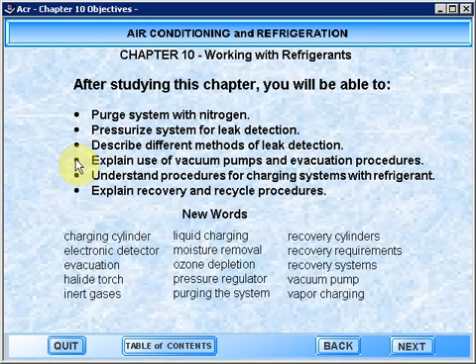After studying this chapter, you will be able to purge a system with nitrogen, pressurize a system for leak detection, describe different methods of leak detection, explain the use of vacuum pumps and evacuation procedures, understand procedures for charging systems with refrigerant, and explain the recovery and recycle procedures.

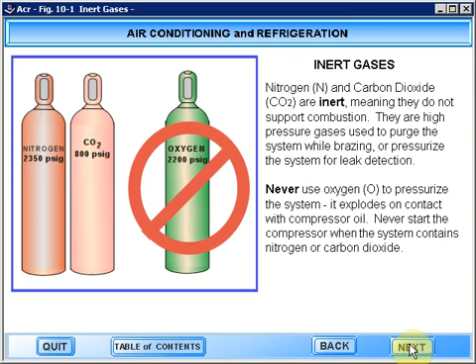Nitrogen and carbon dioxide are inert, meaning they do not support combustion. They are high-pressure gases used to purge the system while brazing or pressurize the system for leak detection. Never use oxygen to pressurize the system; it explodes on contact with compressor oil. Never start the compressor when the system contains nitrogen or carbon dioxide.

A special pressure regulator is used when working with high-pressure nitrogen or carbon dioxide gases. Flow pressure should not exceed 300 pounds gauge. Clockwise movement of the flow adjustment increases flow pressure, and counterclockwise decreases flow pressure.

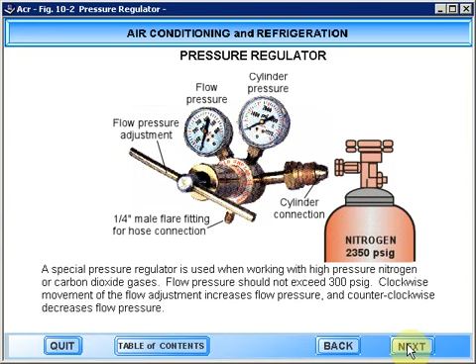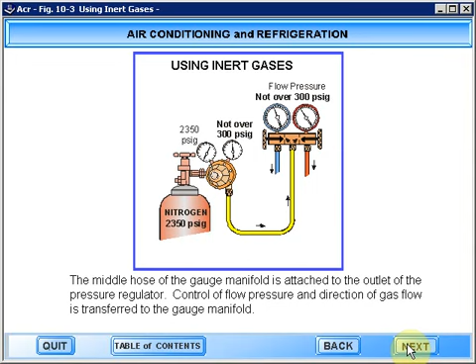The middle hose of the gauge manifold is attached to the outlet of the pressure regulator. Control of flow pressure and direction of gas flow is transferred to the gauge manifold.

Purging the system with nitrogen while brazing keeps the system clean and reduces the time required for evacuation. A continuous flow of nitrogen at 2 to 3 pounds pushes atmospheric air and moisture out of the system to prevent internal oxidation. The nitrogen is vented to the atmosphere to prevent pressure buildup.

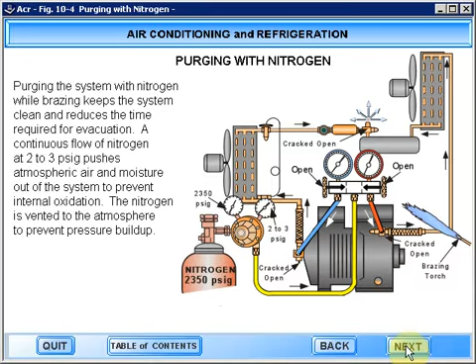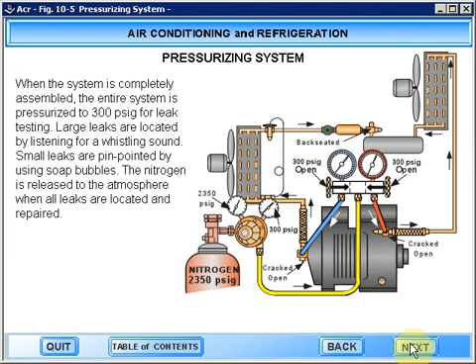When the system is completely assembled, the entire system is pressurized to 300 pounds for leak testing. Large leaks are located by listening for a whistling sound. Small leaks are pinpointed by using soap bubbles. The nitrogen is released to the atmosphere when all leaks are located and repaired.

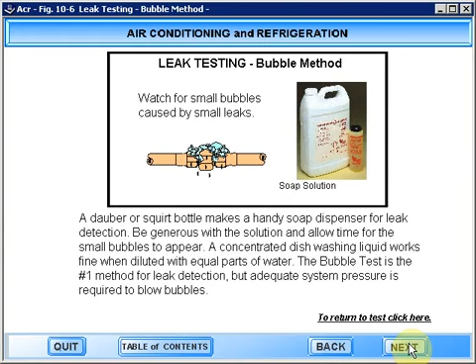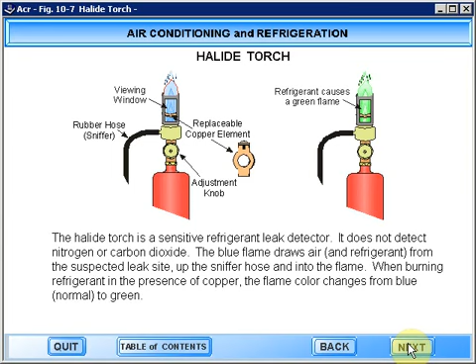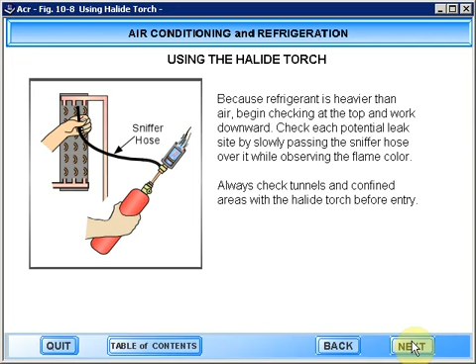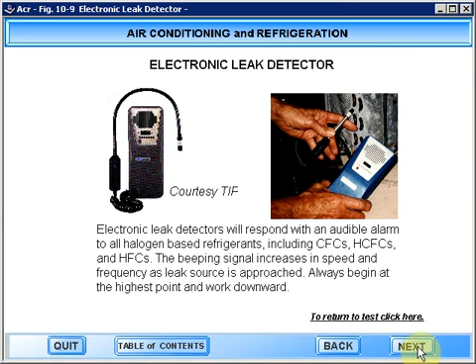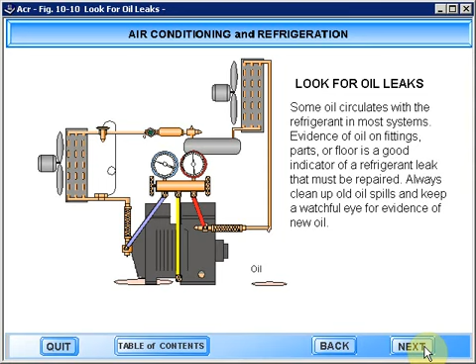Some oil circulates with the refrigerant in most systems. Evidence of oil on fittings, parts, or the floor is a good indicator of a refrigerant leak that must be repaired. Always clean up old oil spills and keep a watchful eye for evidence of new oil.

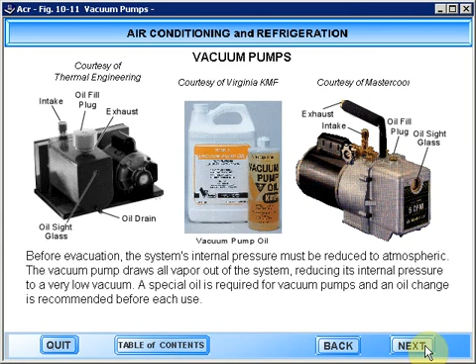Before evacuation, the system's internal pressure must be reduced to atmospheric. The vacuum pump draws all vapor out of the system, reducing its internal pressure to a very low vacuum. A special oil is required for vacuum pumps, and an oil change is recommended before each use.

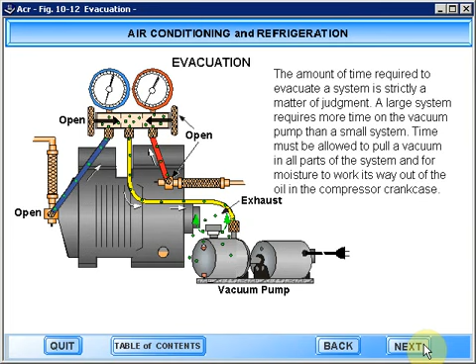Moisture located in traps and in the compressor oil is the last to be removed. Heat lamps can be used to drive moisture out of the system when evacuating. Never use a torch or live steam for this purpose.

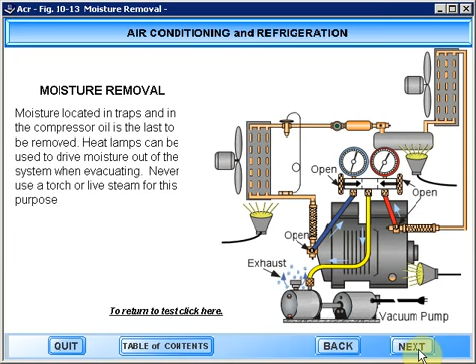A standing vacuum test is performed by waiting a few minutes after performing a thorough vacuum. Holding a 30-inch vacuum for 30 minutes does not mean the system is leak-proof; it means the system is leak-proof at 15 pounds pressure. Charge the system to 200 pounds and leaks may appear. Never use the vacuum pump as a leak detection device.

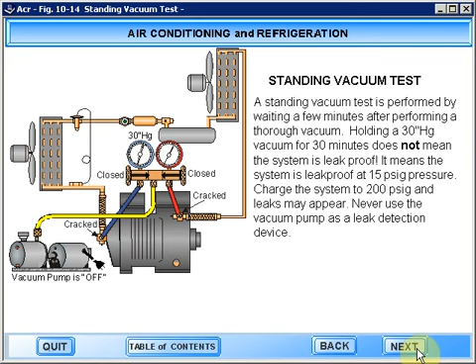Charging the system with refrigerant vapor at the suction service valve while the system is running is an acceptable and safe procedure. The manifold valve must be closed periodically to check true suction pressure. For refrigerant to enter the suction service valve, the cylinder pressure must be higher than the suction pressure.

The refrigerant boils inside the cylinder, absorbing heat from the remaining liquid. The cylinder becomes colder and pressure is lower. Placing the cylinder in a bucket of hot water increases cylinder pressure. Do not use a torch or live steam.

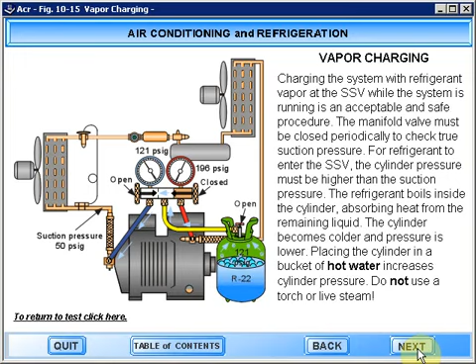Charging by the sight glass is an acceptable procedure if done properly. When the bubbles go away or become very scarce, the liquid level inside the receiver just covers the dip tube inlet. More refrigerant is required to bring the liquid level in the receiver up to about 1/4 to 1/3 full. This extra refrigerant is normally a judgment call and not critical. Use care not to overcharge.

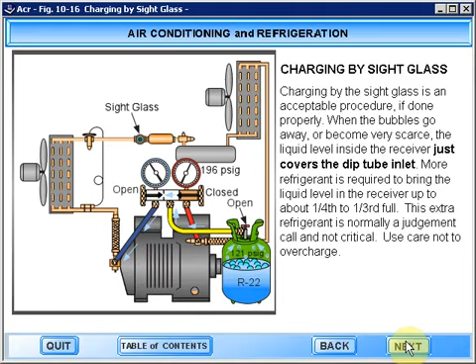The system data plate discloses important information. When the refrigerant and exact amount of charge is known, the technician can weigh the refrigerant into the system.

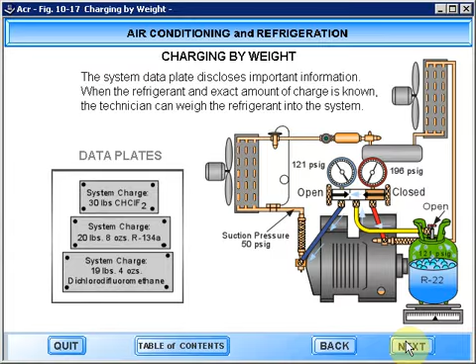Liquid charging into the suction service valve requires skill and caution. The suction hand valve on the gauge manifold is used to carefully meter the liquid. Gauge pressure should not exceed 20 pounds gauge above actual suction pressure. When metering liquid, observe the frost line on the blue hose. When the frost line reaches the suction service valve, close the manifold valve. Frost will immediately disappear and you can check actual suction pressure. Repeat this procedure until charging is complete.

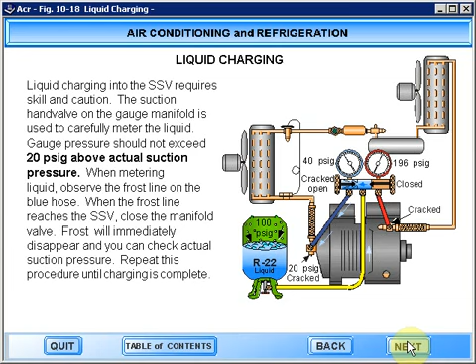Graduated charging cylinders are often used for charging systems having less than 5 pounds of refrigerant. When the exact weight and type are known, this device can be used to accurately weigh the charge into the system as a vapor or a liquid.

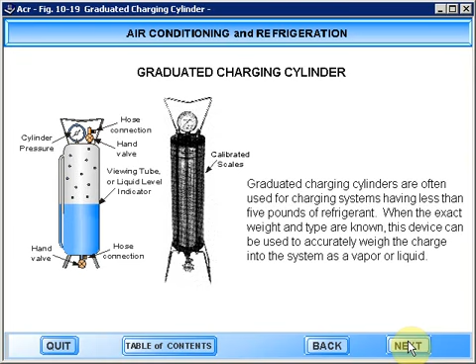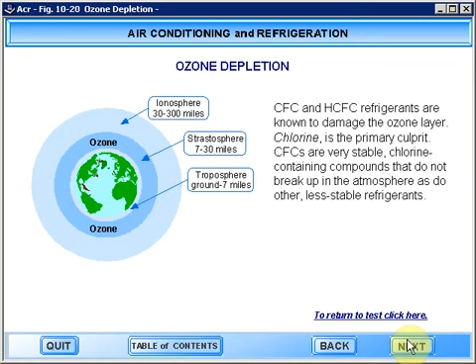CFC and HCFC refrigerants are known to damage the ozone layer. Chlorine is the primary culprit. CFCs are very stable, chlorine-containing compounds that do not break up in the atmosphere as do other, less stable refrigerants.

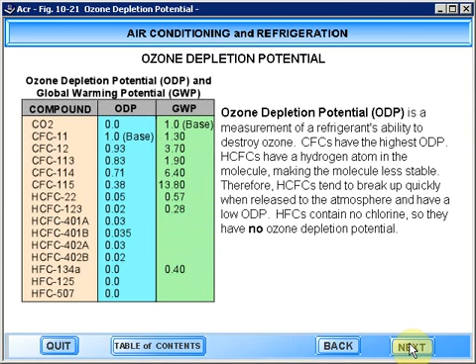Ozone depletion potential, or ODP, is a measurement of a refrigerant's ability to destroy ozone. CFCs have the highest ODP. HCFCs have a hydrogen atom in the molecule, making the molecule less stable. Therefore, HCFCs tend to break up quickly when released to the atmosphere, and they have a low ODP. HFCs contain no chlorine, so they have no ozone depletion potential.

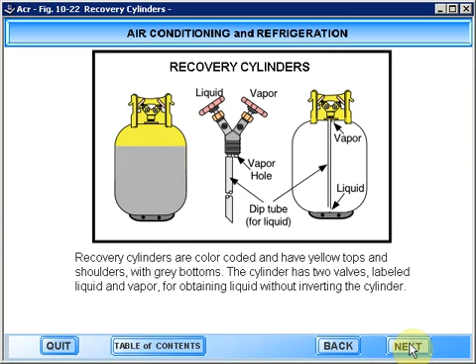Recovery cylinders are color-coded and have yellow tops and shoulders with gray bottoms. The cylinder has 2 valves labeled liquid and vapor for obtaining liquid without inverting the cylinder.

Recovery equipment is designed to remove refrigerant from a system and transfer the liquid to a refillable cylinder. When repairs are completed, the refrigerant may be returned to the system. This recovery procedure is mandated by federal law to prevent release to the atmosphere.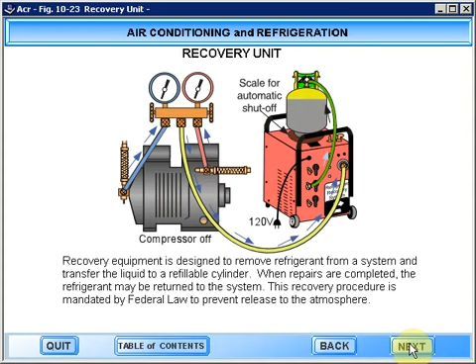Refrigerant recovery is accomplished by connecting the gauge manifold to the suction and discharge service valves, then connecting the middle or yellow hose to the recovery unit. The recovery unit is then turned on. The recovery cylinder is normally placed on a scale to prevent overfilling.

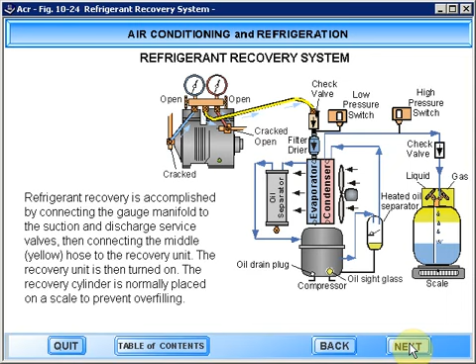If the recovery equipment was manufactured before November the 15th of 93, the refrigerant must be recovered to the levels indicated in the middle column. If the recovery equipment was manufactured after November the 15th of 93, the refrigerant must be recovered to the levels indicated in the last column.

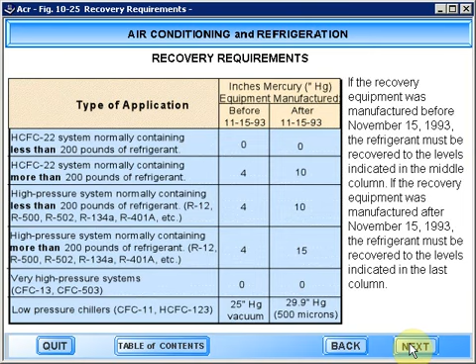After a pump down to capture liquid in the receiver, the inlet service valve must be closed. Vapor trapped in the condenser and hot gas discharge line must be removed by the recovery method. Repairs can then be performed on either side of the system.

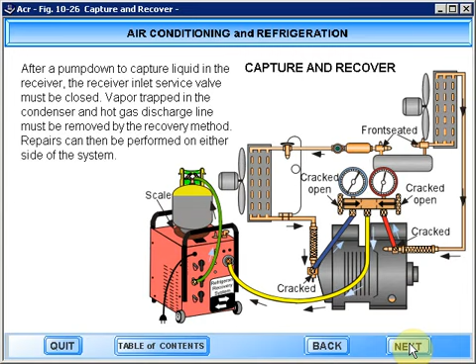This slide illustrates the passive recovery method for a capillary tube system with the compressor operating. A saddle valve is installed on the high pressure side only. The cold recovery cylinder will condense about 90% of the system refrigerant. This procedure is EPA approved.

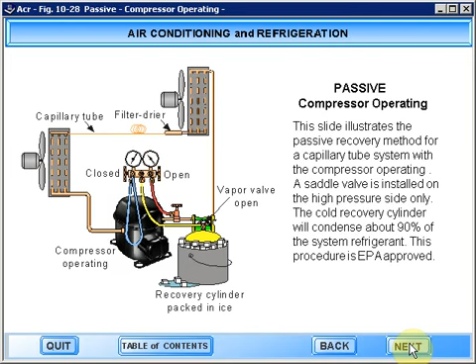Active recovery involves using a self-contained, independent recovery system. Refrigerant is withdrawn from the refrigeration system as a vapor, condensed to a liquid, and then stored in a refillable cylinder. Always use a scale to prevent overfilling the cylinder. The refrigeration compressor does not operate during the recovery procedures.

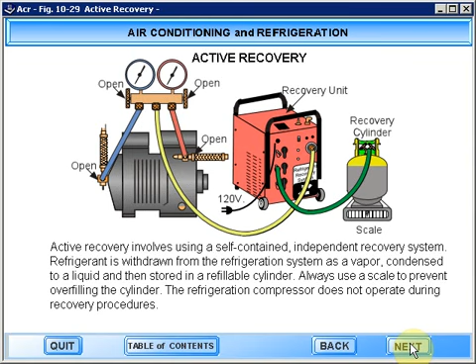Inside a recycle unit, a liquid pump pulls liquid from the bottom of the cylinder via the dip tube and liquid valve. The liquid refrigerant passes through a replaceable core filter-drier and is returned to the top of the cylinder via the vapor valve. Recirculation of the liquid refrigerant through the filter-drier removes moisture and contaminants and may require several hours to accomplish this purpose.

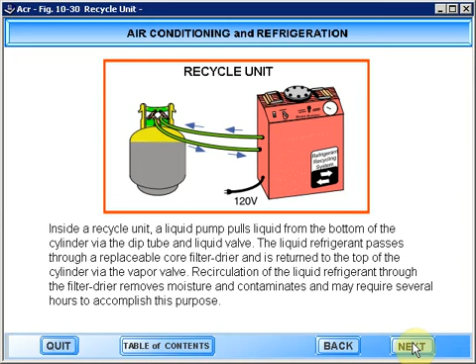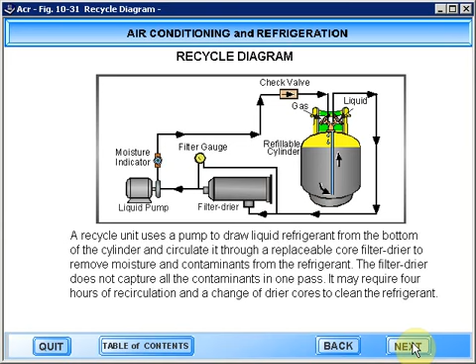A recycle unit uses a pump to draw liquid refrigerant from the bottom of the cylinder and circulate it through a replaceable core filter-drier to remove moisture and contaminants from the refrigerant. The filter-drier does not capture all the contaminants in one pass. It may require 4 hours of recirculation and a change of drier cores to clean the refrigerant.